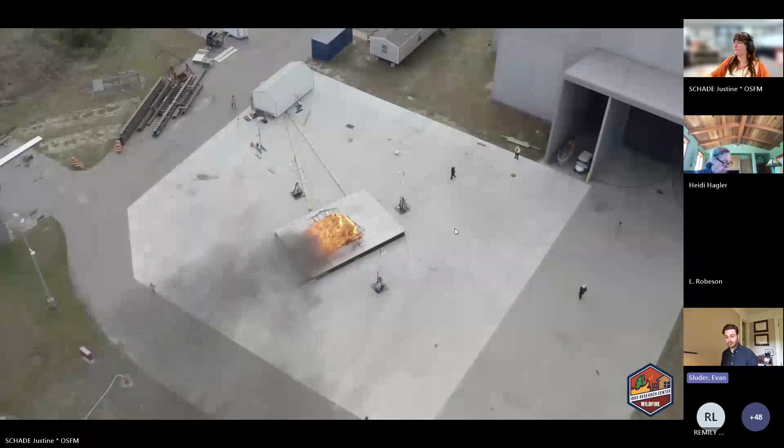So a lot of our work at the moment is focused on addressing the conflagration problem, and this is also the focus of a lot of the building fire science community. In these fires we see areas of extreme fire behavior that mimics the extreme fire behavior we have observed previously in the wildland, where we see large areas of destruction with pockets of unburned fuels or structures. Generally, these fires are caused and driven by intense or extreme weather scenarios like the Santa Ana downsloping wind event during the LA County conflagrations.

Sorry, Justine, could you go to the next slide, please? I've tried clicking. I think my computer is now frozen. Oh no. So maybe the slides are part of the problem. Okay, I think I got it. There we go. Thank you. Next slide after this, or is this one good? Yeah, we can go ahead and go to the next one.

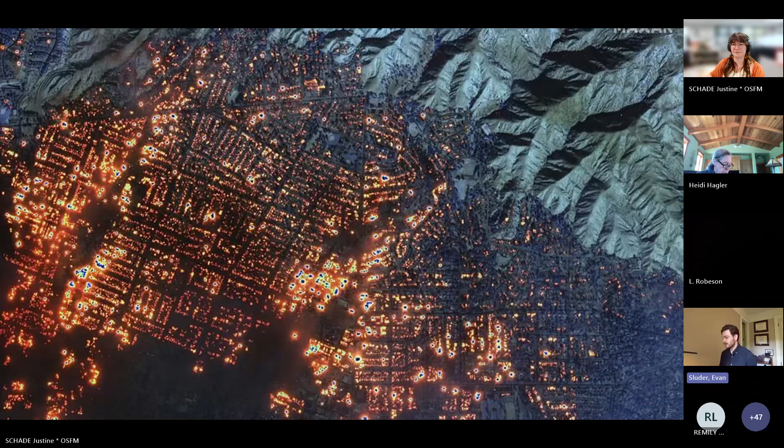When wildfires interact with our communities, structures are exposed through embers, radiant heat, and direct flame contact. Embers are normally the first thing to arrive in our communities. If you could hit the next button on the slide there, Justine. They are capable of igniting structures themselves or interacting with the fuels around our structures. Under fire weather conditions, those can develop into fires themselves, which then expose our structures to radiant heat and direct flame contact, leading to high intensity exposures. Next progression on this slide, please. And again.

So when fires enter our communities and begin to spread from structure to structure through more of these urban fuels, we've identified aspects of our communities and how structures and other combustible items are laid out that impact fire spread and the intensity of fire spread between structures. Those are structure separation, connective fuels, and our building materials. A few more clicks there, Justine. Thank you so much.

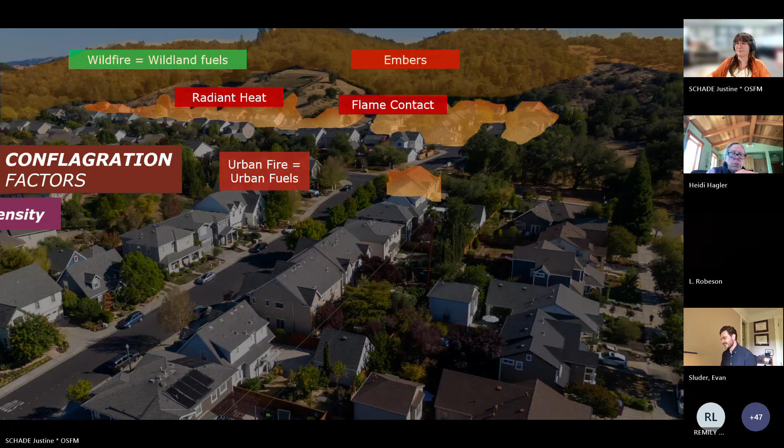And for each of these, our structure density or structure separation is how close our structures are together. Connective fuels are classically things like fences, sheds, other vegetation, and the building materials kind of reflect how much heat exposure or exposure to these different ignition mechanisms our structures can withstand. So our work is now focused on reducing the potential exposures that our structures can experience or will experience, and hardening our structures to the remaining exposures that exist to prevent ignition.

Next slide, please, Justine.

So when we think about reducing potential exposure and hardening our structures, NIST did a great job of kind of coining these two different dials that we can turn at the parcel level and when we're thinking about our structures. So we're working to simultaneously increase the resilience of our structure through our building materials. So thinking about including a Class A roof or 1/8-inch mesh screening on our vents or non-combustible gutters, while simultaneously reducing the potential exposure that the structure could experience.

So that's taking a look at maybe that combustible fencing that's close to the structure, the debris or other items that may have accumulated on the roof or in the gutters, and the fuels that are within that first 5 feet around our structure. So whether that's a wood pile, vegetation, or other materials that could be capable of ignition.

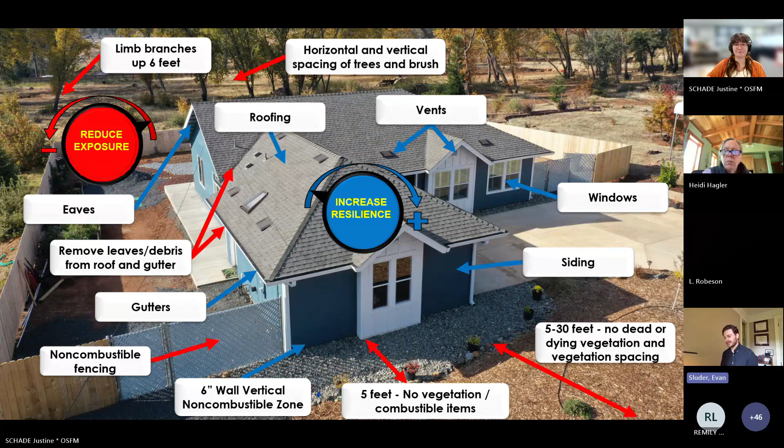So our Wildfire Prepared Home program at IBHS is designed and is meant to be a tool that acts as a benchmark for the combination of these two mechanisms, the resilience of our structure and the exposure reduction. And we've compiled these recommendations through our work in the laboratory, our post-disaster investigation, and our working codes and standards. There's essentially two levels of the standard that focus on the three exposure mechanisms that I discussed earlier.

So we have our Wildfire Prepared Home Base Standard, which we describe as kind of being the most essential mechanisms that we want to be on all structures that are within areas that are capable of being exposed to wildfire. And it focuses on preventing ignitions from embers, which we know are the most prolific cause of loss during wildfires. They expose large areas of structures in our communities simultaneously and are responsible for multiple ignitions. And the situation as those fires develop is generally why we see that these wildfires are capable of overwhelming our suppression resources within our communities.

While our Wildfire Prepared Home Plus standard focuses on enhanced protections that give structures benefits in reducing the potential exposure from direct flame contact and radiant heat. So as well as in the base standard, we also focus on that exposure reduction. So we address the potential for fire to spread up to the side of our structure or ignite fuels within that first 5 feet, which could cause those high intensity exposures.

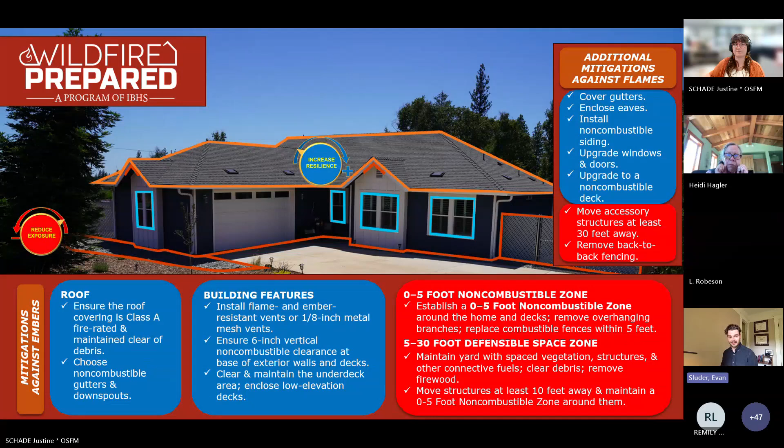All right, so the first concept or portion of our standard that I want to discuss is the defensible space in zone 0. So this falls under the connective fuels kind of section of the community fire spread because it is essentially eliminating any combustible items that exist within that first 5 feet around our parcel. And there's a couple of reasons for that.

Could you click once, please? Start the video there. Perfect.

And the first one is to address the spreading fire potential to our structure. When we have connective fuels or materials that are ignited on our parcel and they have a direct pathway to our structure, generally we'll see under wildfire conditions that that spread is possible and it results in direct flame contact or very high heat fluxes to our building materials. And even our most resilient building materials have a hard time performing when they're receiving this type of exposure.

Next slide, please, or next click, please.

Thank you. The second reason is that first 5 feet around our structure is a key area where we're working to address ember exposures. So we know that when embers interact with our structures, they either hit the wall, the outside of our structure, and fall straight down and accumulate at the base of our wall systems, or they recirculate and accumulate in areas around our structure. Where you would normally see debris or other items accumulate during a windstorm, that's generally where we see embers accumulate.

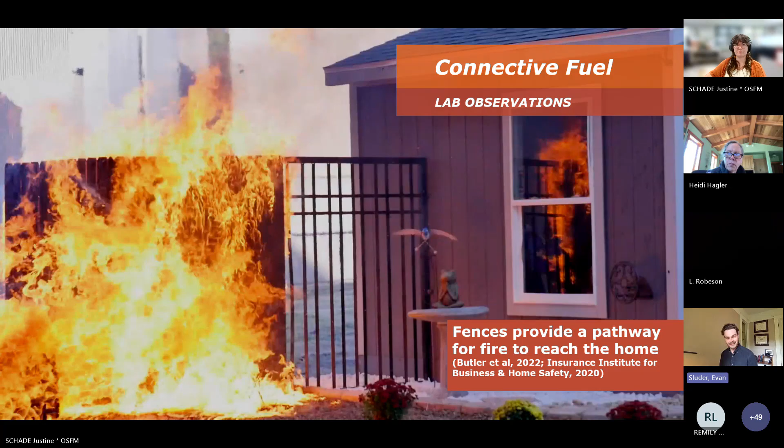When we're in the field, there's a lot of different examples of things that can provide these types of exposures within the first 5 feet that are really important to address and mitigate. Fences, even when it's just the gate that's combustible, are still capable of providing significant exposures. We see a lot of examples of vegetation, particularly when they're located on mulch beds or underneath vulnerable components like windows. During the Pacific Palisades fire, it was trash day. So unfortunately, there were a lot of very full trash bins located near structures, which resulted in high intensity exposures.

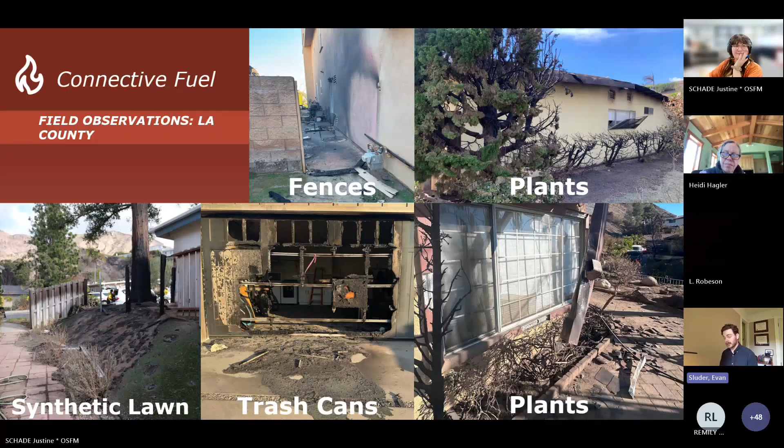And of course, synthetic lawn and mulch, other ground cover materials that are capable of harboring and then allowing for fire spread, provided pathways for fire to move through yards and between properties. So most of these instances, we're able to capture because of firefighter intervention. They stop failures while they're happening. So it's freezing time so we can understand what was happening, how these types of failures progress, and learn from them and try and recreate these types of exposures in the laboratory. Next slide, please.

While we were in LA County, we were able to do a detailed investigation on around 250 structures where we took a look at the impact of fuel coverage within that first 5 feet around structures, and we're able to quantify that there is an impact on survivability and potential for damage or loss when we have higher fuel loads within that first 5 foot region. The next step for this is to hopefully scale this up either using satellite imagery or data collection on future fires to really begin to understand and quantify the impact of this fuel loading. Next slide, please.

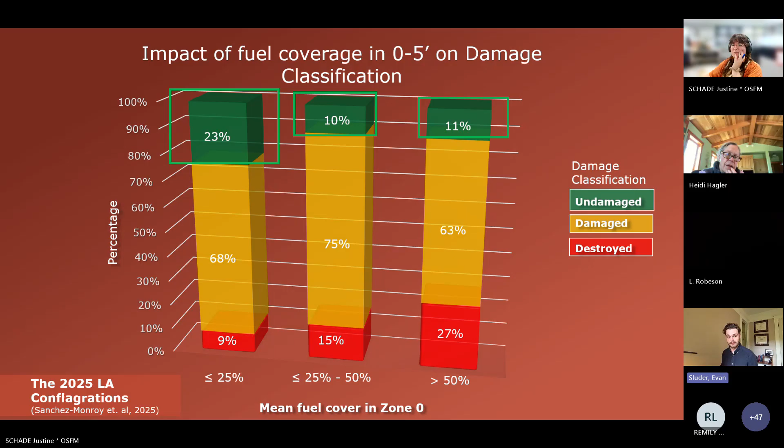So when we think about our building materials, a key concept that we consider is the exterior envelope. As I mentioned earlier, we're really focused on addressing the fire exposure from embers, direct flame contact, and radiant heat. And our exterior envelope of our building, the materials that make up the outside of our structure, are our resistance to those exposures. We know that unfortunately, if structures do ignite during these fires, it is very likely that they will be a total loss because they become dependent on firefighter intervention in order to remain standing or survive that fire exposure.

So we spent a lot of time investigating these exterior envelope building materials and the types of failures that we see in the laboratory. When it comes to windows, claddings, and eaves, we know, for instance, that double pane tempered windows provide the most resistance to these exposures, but it also takes a good amount of trying to understand how we could reduce the potential exposure. We've observed recently that instead of breaking, panes actually have the capability to just fall out under high heat exposures and high wind speeds. So to address that, we're spending more time looking outward from the structure and really focusing on potential exposures and how to address those.

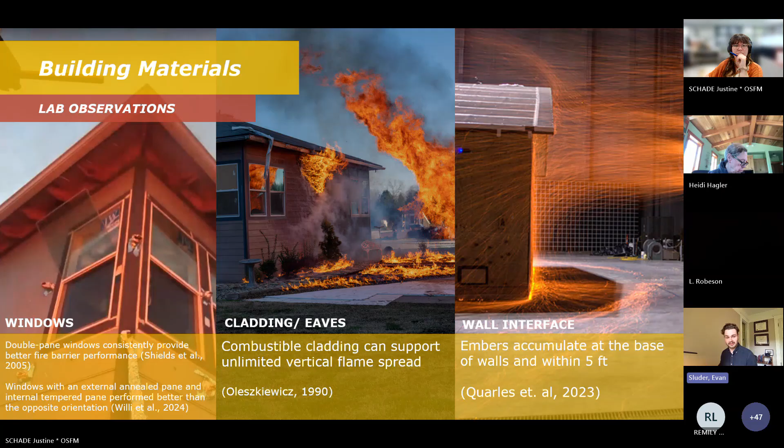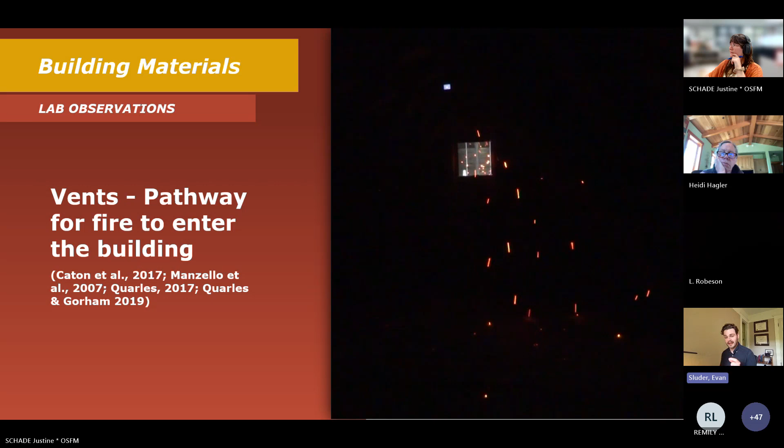Vents are another key portion of that exterior envelope, and one that we often see overlooked. But the video that you're seeing now is quarter-inch mesh screening. And essentially what that's doing is allowing embers inside the structure that have enough size or energy that they can continue to burn as they reach the ground.

Mitigating that exposure through reducing the size of that mesh, so 1/8-inch metal mesh screening, reduces that ember size, reduces the energy, and prevents that ember from being able to ignite anything after it has passed through the vent screening. Next slide, please.

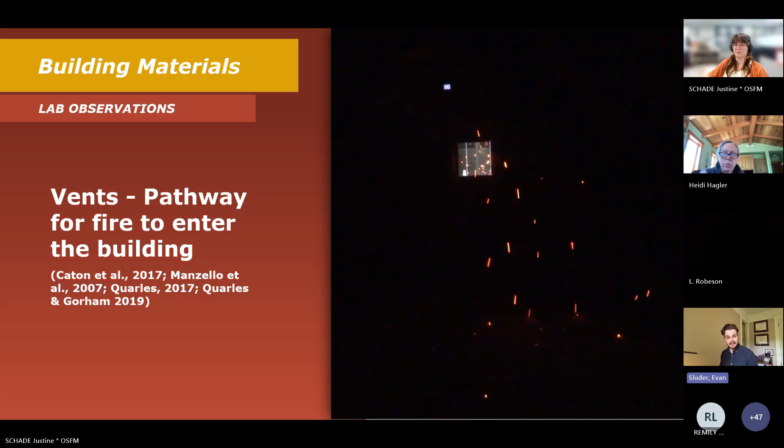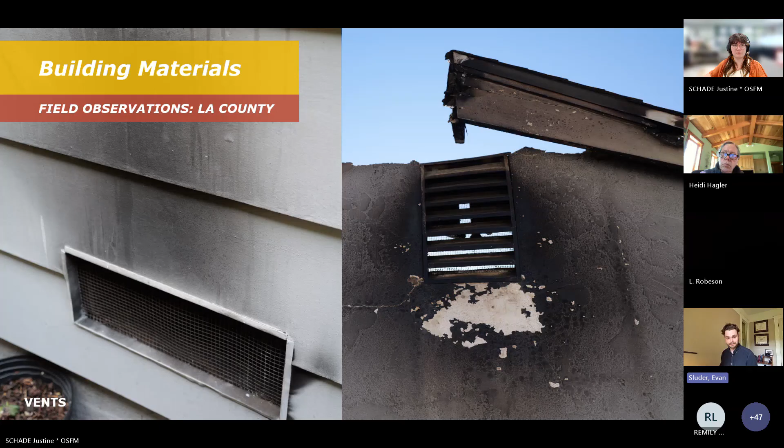We saw in the field that it was less than 6% of surveyed structures in the CAL FIRE DINS data and less in the Eaton Fire, and less than 10% of the Palisades had this metal mesh incorporated. So we anticipate that embers played a large role in initial ignitions of these structures. Also, because there was evidence of internal ignitions that had been suppressed, but they were quite visible during our deployment. Next slide, please.

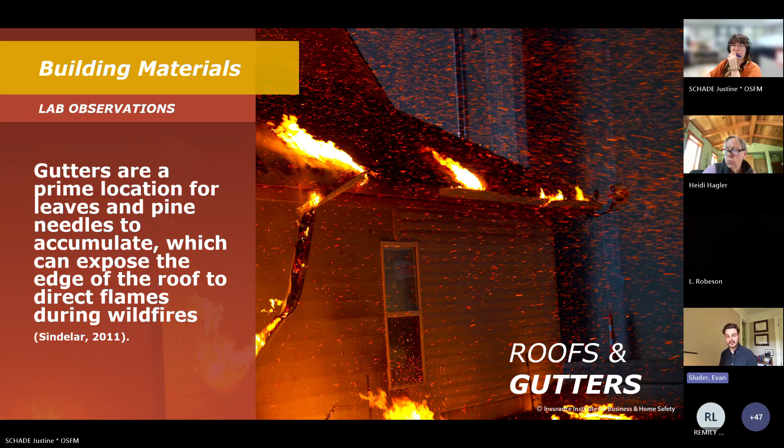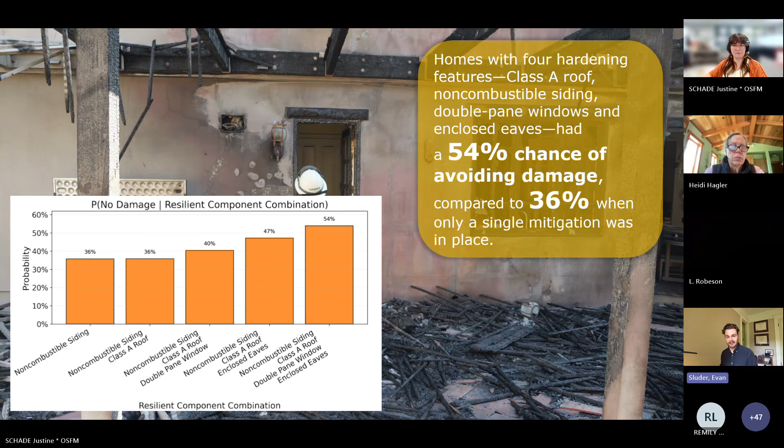And finally, I want to talk about structure separation. So a key focus of our work right now is to, one, understand the type of heat exposures that are possible when we're working in this wind-driven fire spread scenario where we have the ignition of structures under these high wind conditions. Really trying to understand what building materials need to withstand so we can develop our strategies for community mitigation and fire spread.

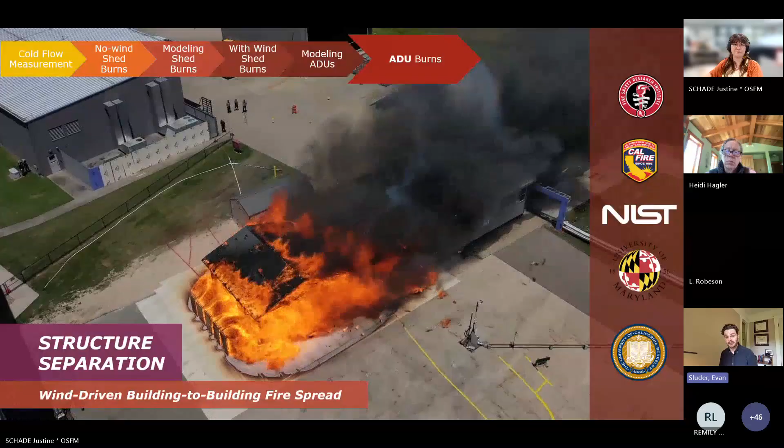We're also using these experiments to help inform other scientists that are working to model and better predict how these fires might spread. So it's a lot of work going into understanding, one, those exposures, the impact that building materials have in resisting the potential for ignition in these scenarios, and working to better design our communities to resist these types of exposures. Next slide, please.

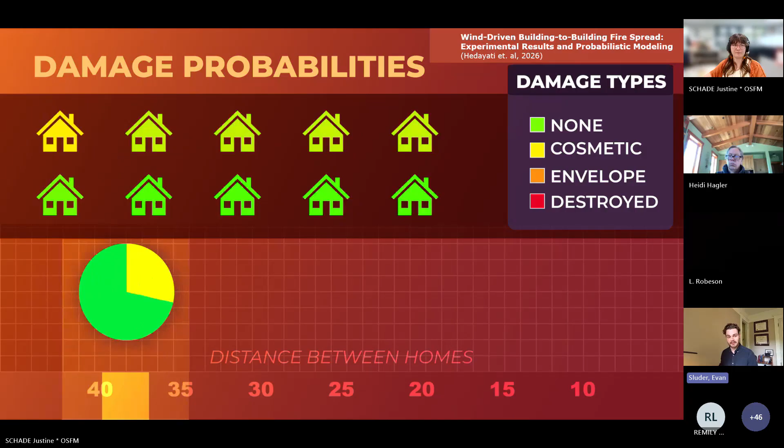We were able to investigate and observe these impacts at the Palisades and Eaton fire. So this is structure separation data and wind direction, which showed a clear relationship between the downwind condition being the worst case scenario and a positive impact in terms of damage when it came to increasing structure separation distances.

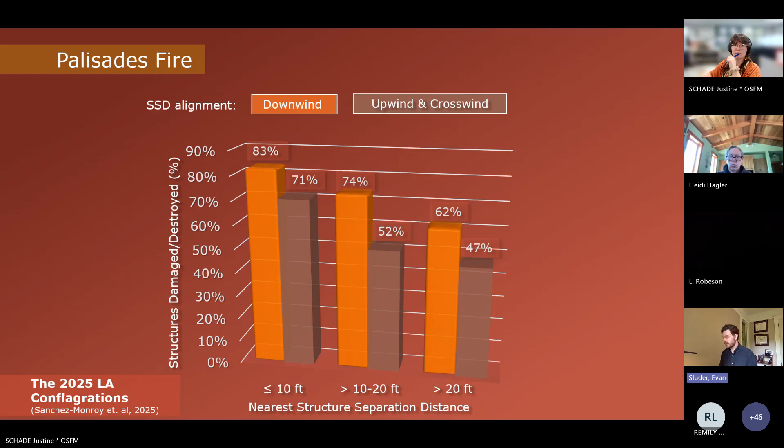All right, so to reiterate what we've just discussed and what this tells us about our collective efforts to increase risk reduction in these scenarios at the parcel and the community level. We need to focus on preventing ignitions. Every ignition of our structures that we can prevent, especially at the early stages of our exposures, creates significant differences on the downstream impacts during these fire scenarios. So reducing ignitions of our structures is key in mitigating the conflagrations we have seen in recent years.